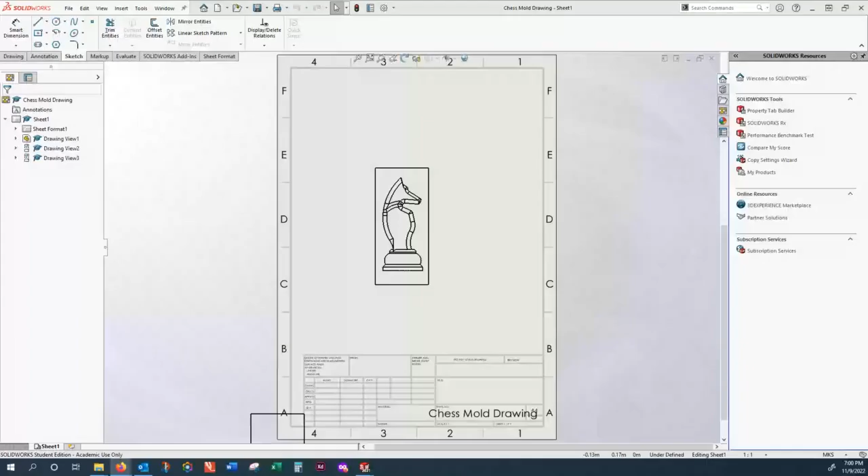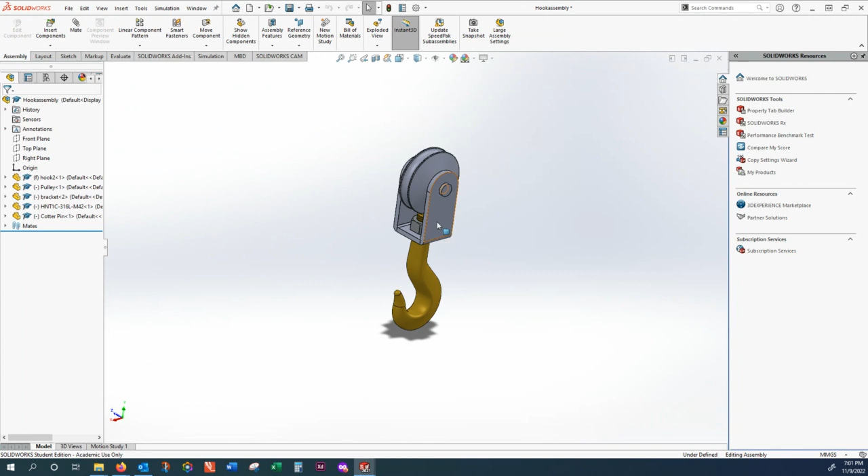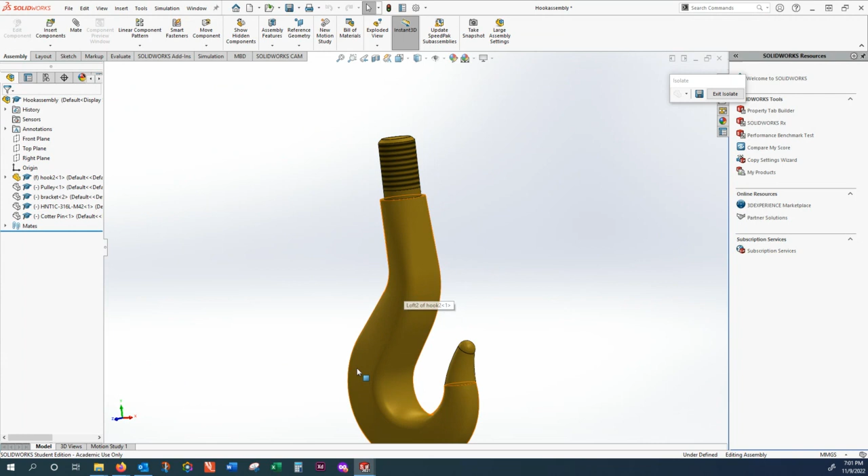Let's start with the hook assembly. It is composed of a hook part, detailed in the Canvas shell. You have access to a YouTube channel showing how to start making a path, a few sections, and loft the surface through that path using the sections. That part has step-by-step instructions.

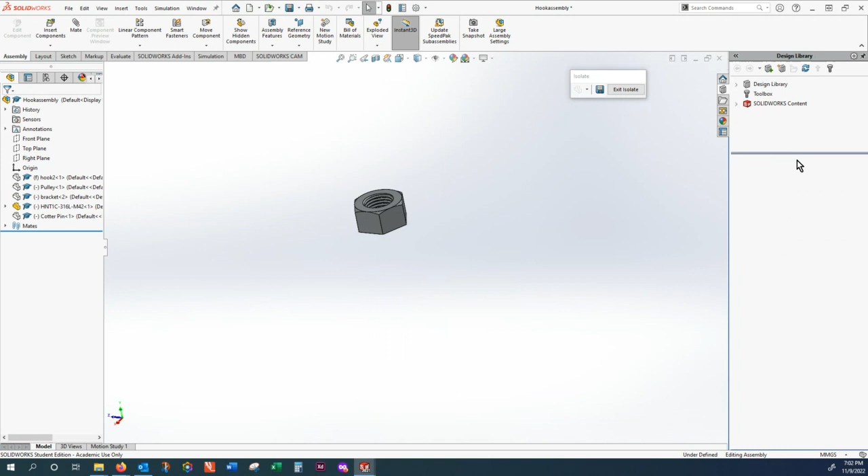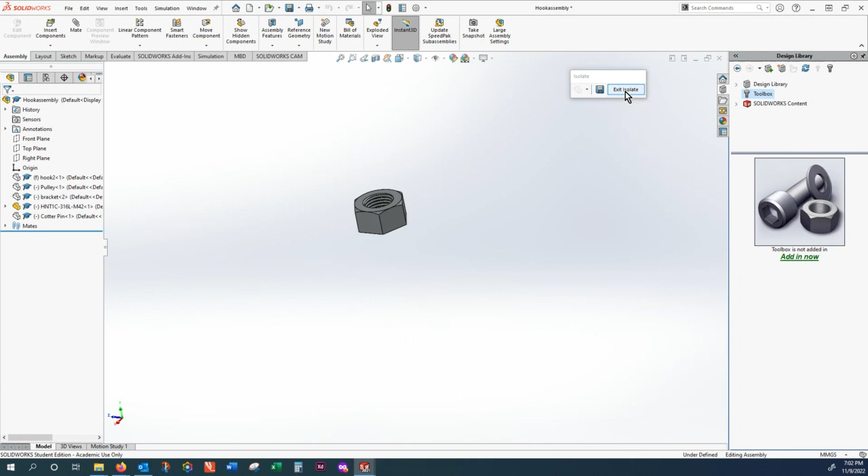What you have to do extra is make a nut and bolt. This one you can simply import from your library of parts, instead of making it. Go to the library of standard parts, from the toolbox get the standard parts option, then drag and drop. All you have to do is specify the size - in this case I think that's an M42, metric 42 millimeter.

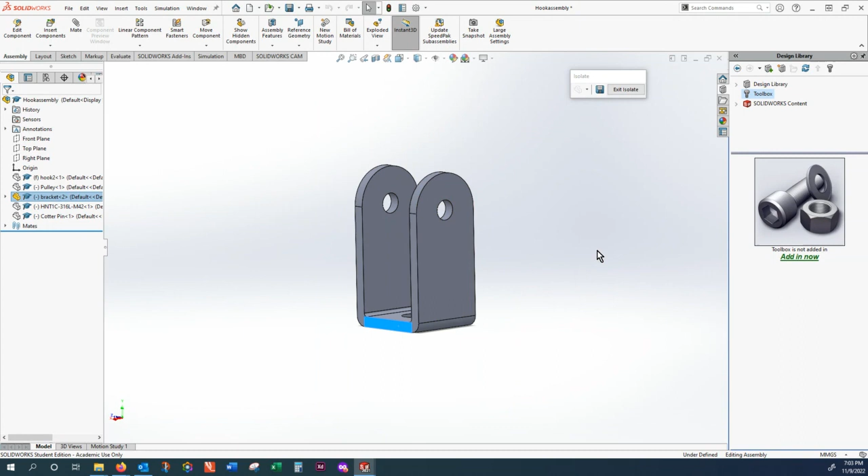So this is not really making a part - this part is a simple one. You can just decide what dimension you want. All you have to do is make a sketch like this one, extrude it to make the shape, then fillet the edge, drill a hole, drill another hole, add a couple of fillets, and that's all. This part can also be done using a module from sheet metal forming, which we didn't include - just not a unique way of making the same part.

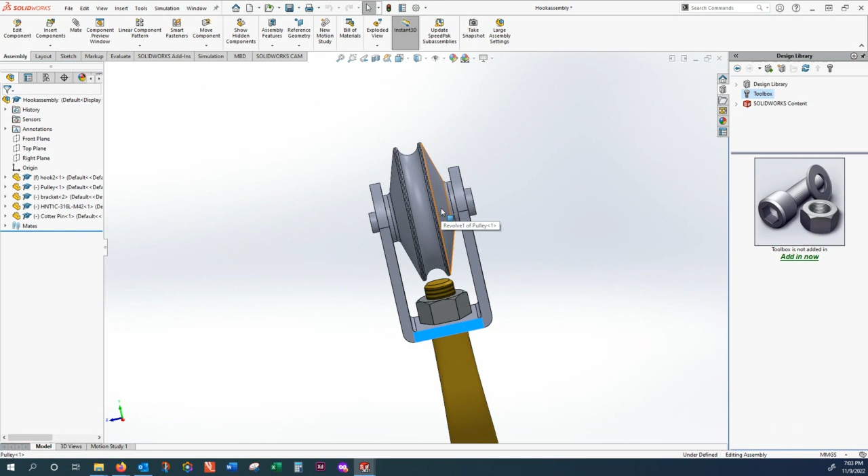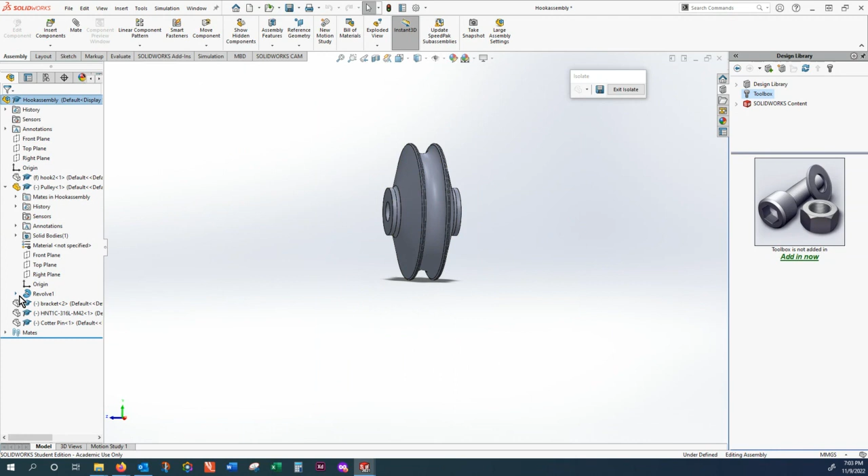The last part you have to make is a pulley. This pulley is simply hand-free and not complex to make. The difference between this part and what you've done before is first you need to make a sketch - I'll show you how it looks. This could be a hand-free sketch. All you have to care about is that the width should match that of the U shape. Everything else you can just do like a drawing with some minimal dimensions added.

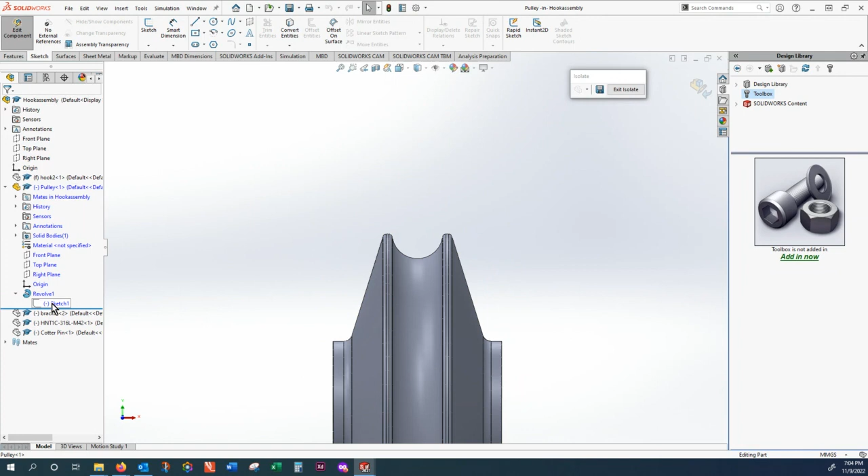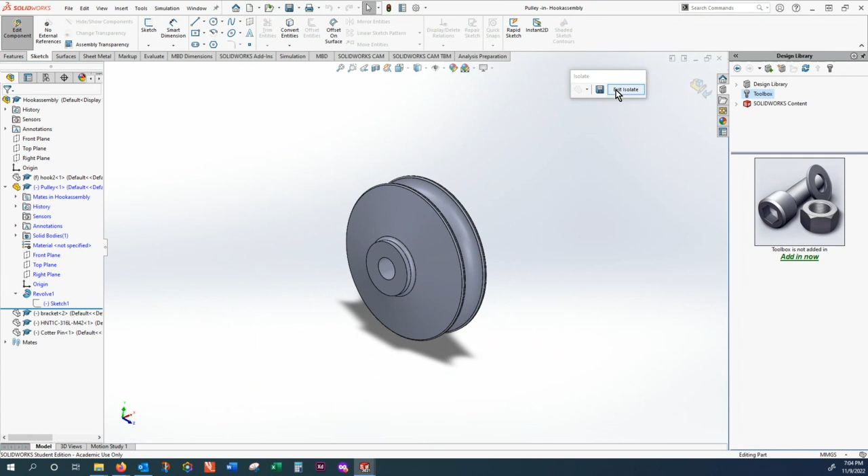Once this sketch is complete, let's go back again. Within that sketch, notice I defined the center line here, so this sketch would be revolved around this axis to make an axisymmetric part. By revolving that, you get a pulley. Then the remaining thing is to assemble one, two, three, four, and also a pin, which should be fitted in. From that, you generate a bill of material, which I'll demonstrate later. I think that is all about the pulley system.

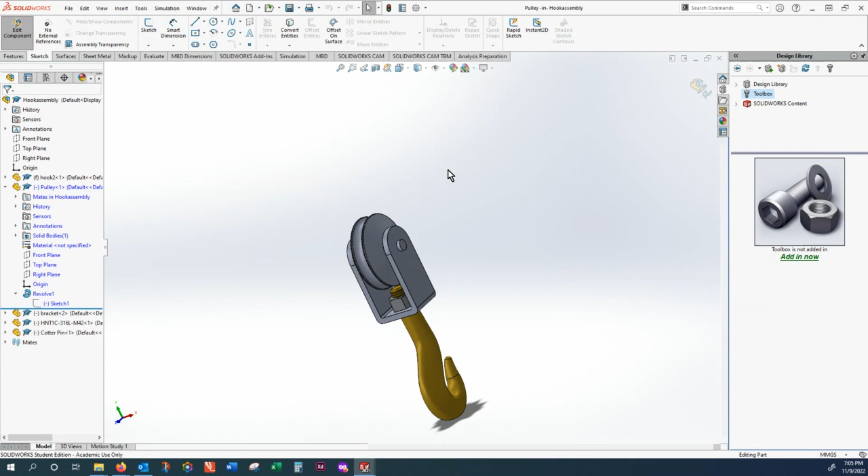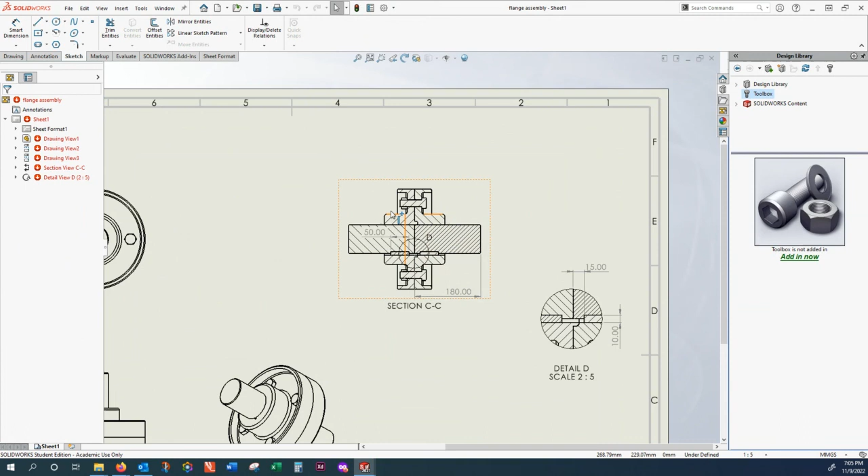Let's move on to the next one, the flange assembly. This is the drawing, which should give you an idea. We have two flanges used to make a coupling between a shaft on the right hand side and left hand side, and you see there is a keyhole to make sure there is no slipping between the shaft and each flange, and the flanges are bolted together.

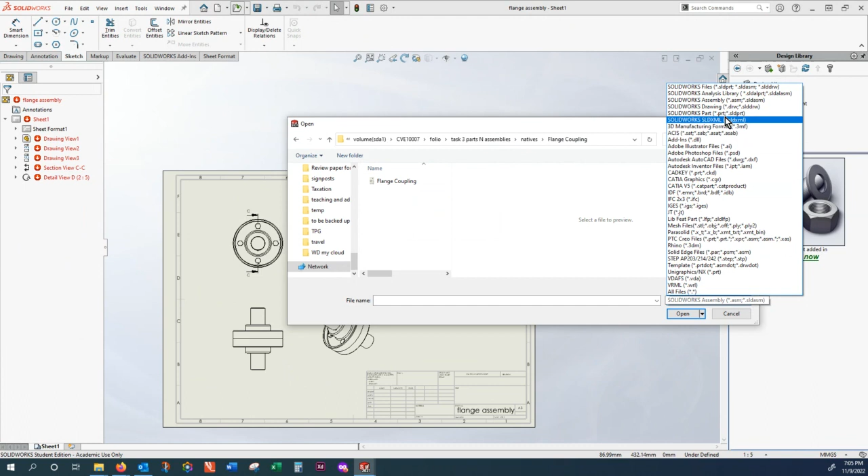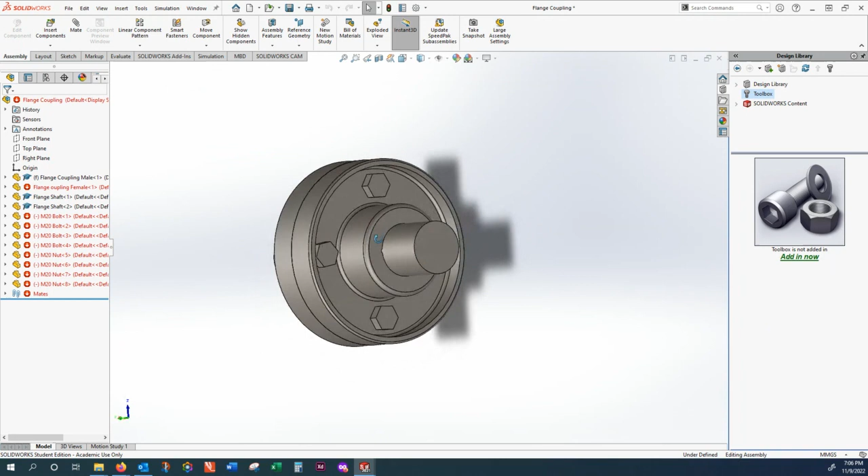With that flange coupling, let me show you the 3D model. Again, this 3D assembly is composed of a number of parts. Here, exposed, is one shaft. That is a shaft with a keyhole. And then there is a flange.

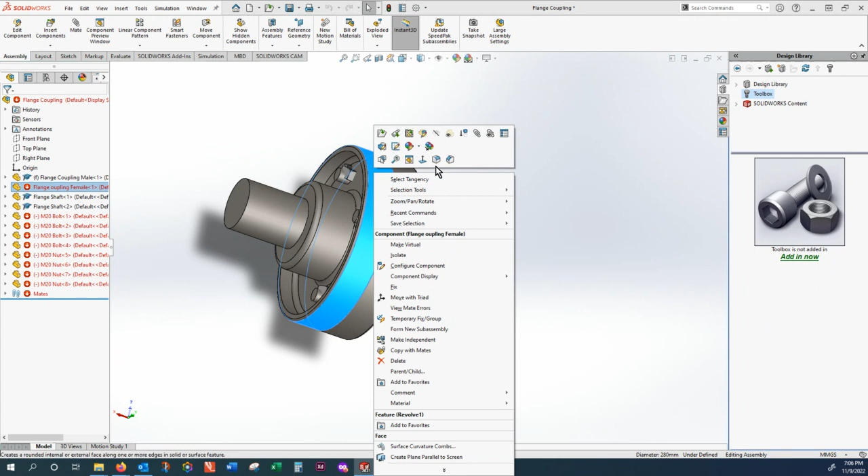This flange has a step to make sure it is concentric with the next step, and it also has a keyway which goes all the way through it. You have a similar flange, perhaps a little different - one has a male protrusion, this one has a female, but the left hand side is the same. There are four holes for fixing the flanges together, and the keyhole goes through the entire flange.

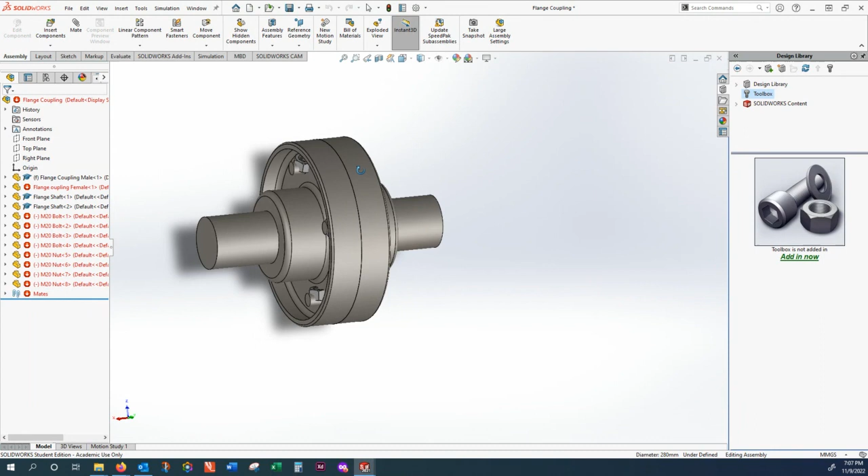Of course, there is a second shaft here, and like what we did before, bolts and nuts are just borrowed from the library of standard parts - you don't have to really make anything. So that is regarding that assembly.

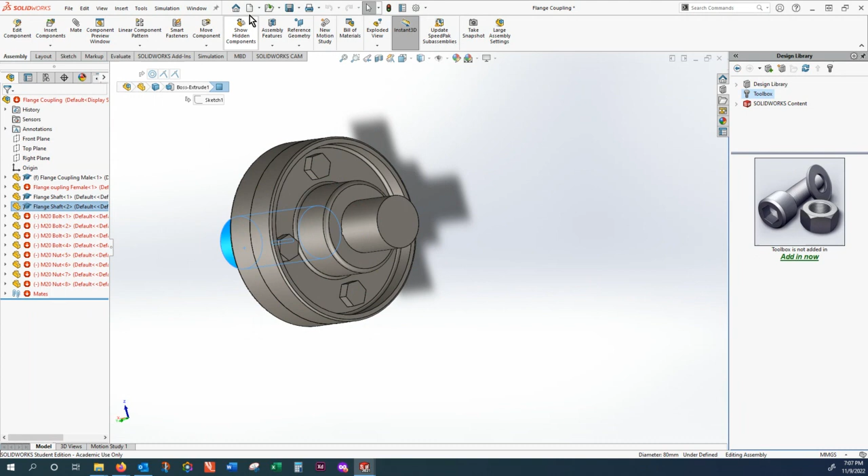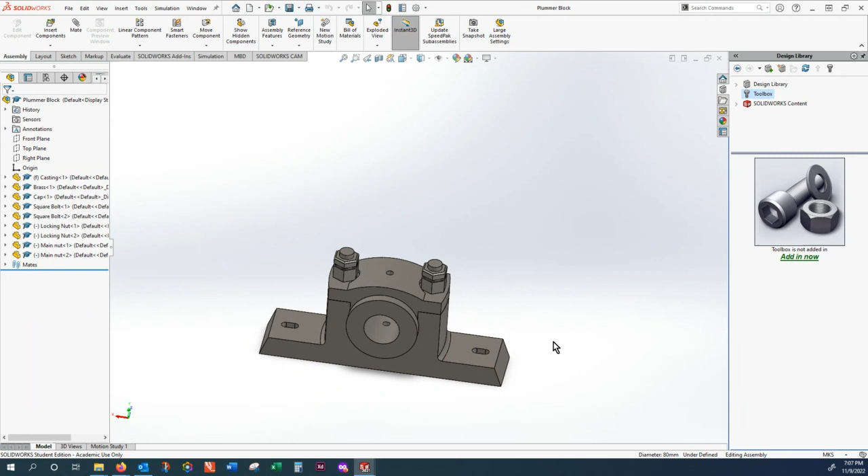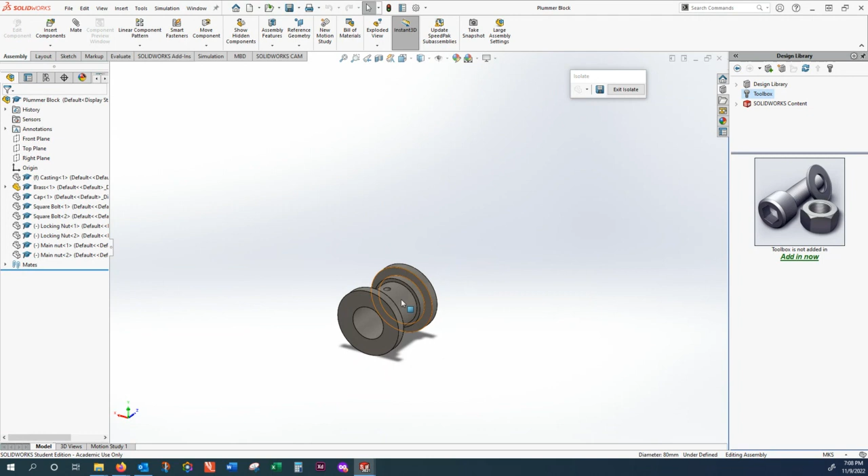Let's go on to the next one, which is a Plummer block. This is an open-ended design - you want to make sure the center between the fixation points matches, because this has to interface with an existing platform. The key part here is the bearing. That bearing has an inner dimension, has a flange on each side, and has a hole for letting the lubrication, the oil, flow around from in to out. These dimensions dictate how the other dimensions and parts you have to make.

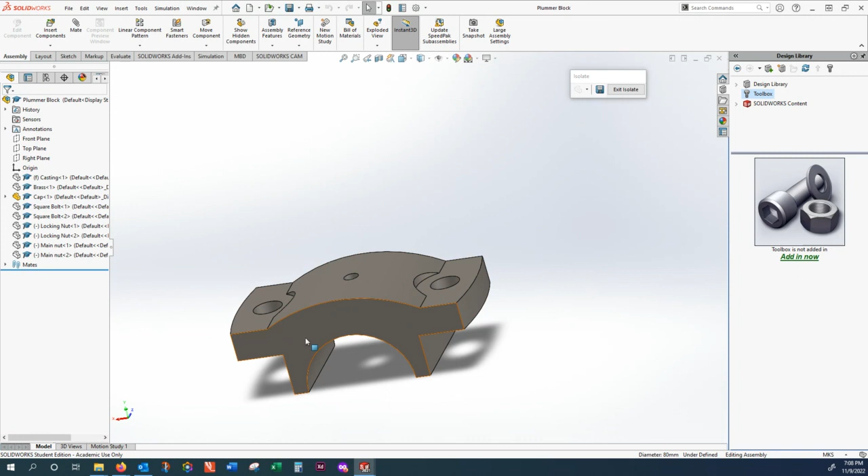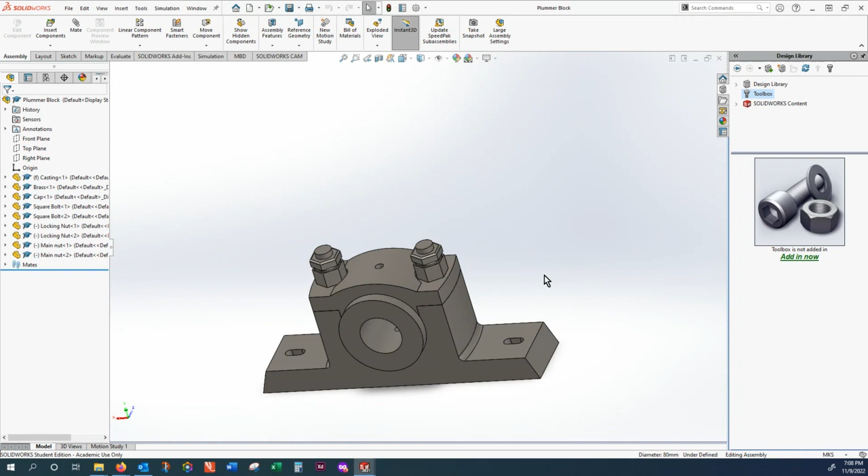There's one part here - let me show you - that is the upper cap. This upper cap has to match the diameter of the bearing, and these are round faces. That's a simple extrusion, and here there are holes for letting oil go in. Again, all these dimensions are open-ended - you can choose as long as it matches this diameter and matches the lower cap, you'll be okay. So the other part you have to design yourself to make this assembly.

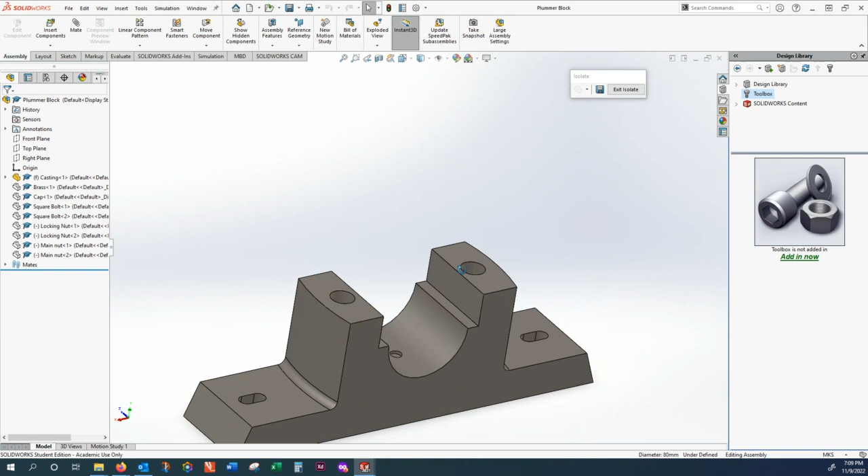Here, again, the key dimensions are the distance between the fixation points. This is the lower cap, which has to match the bearing and match the upper cap. Let me show you how it will look. Then we remove some material from below to make this lighter and consume less material. I think that is all - again, a couple of nuts and bolts, you just borrow them from the library of parts. And that is this assembly component.

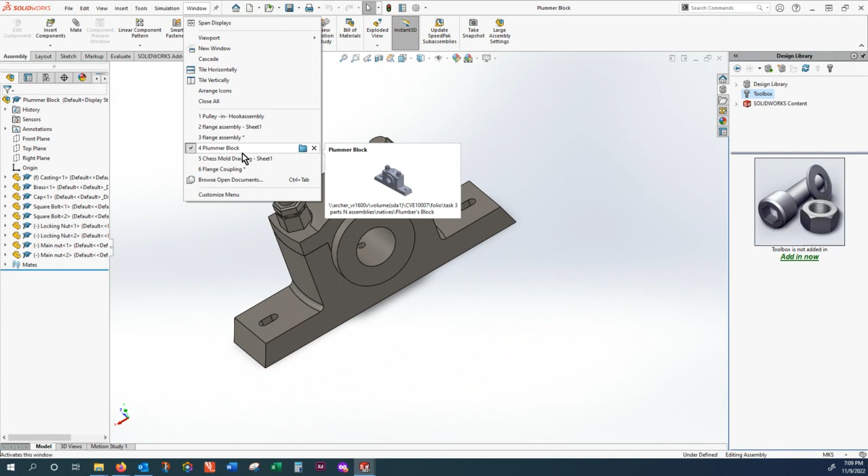So what else will you be doing? Going to the pulley, flange assembly system, Plummer Block, chess mold. For the chess mold, again, there are YouTube demonstrations showing you from an existing chess piece how to make a negative, removing material from a block. This is actually the second view of the block.